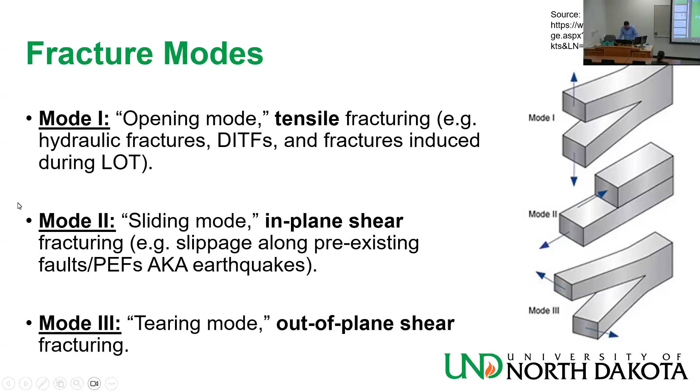Last time we finished talking about shear failure, we saw something very important, which was the Mohr-Coulomb diagram. We have this picture from Miss Gono's thesis. I think now she's on the East Coast doing something related to data analysis.

She used the Mohr circle to indicate how injecting salt water in the Fort Worth Basin can get pre-existing faults in the vicinity of those injection wells close to slipping. You get bigger and bigger fault slippage, and then you get the failure, the earthquakes everybody is observing. Initially they blamed hydraulic fracturing, but then they realized it's not hydraulic fracturing itself, but a byproduct of it, which is tons of salt water that had to be dealt with and got reinjected underground into the Ellenberger formation, and that basically causes earthquakes like crazy.

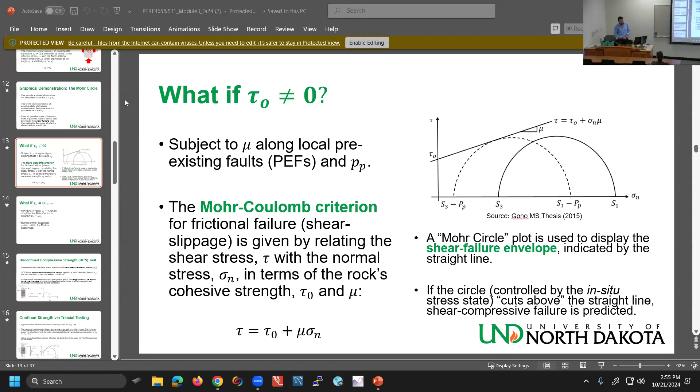It's not good, it releases all the pressure. It's like you are providing a conduit for the fluid to move, and then the fluid basically prefers to go there than create the bigger job you actually want.

Anyway, then we talked about Mr. or Doctor, I don't know, Byerlee, 1978. He did experiments on very big blocks of rock and found that for the stuff we're talking about, mu is about 0.6 to 0.8. If he had to put a point at one of the two edges of the spectrum, he would say 0.6 is pretty accurate. It's pretty good - you wouldn't expect it to go beyond 0.8 or too much less than 0.6.

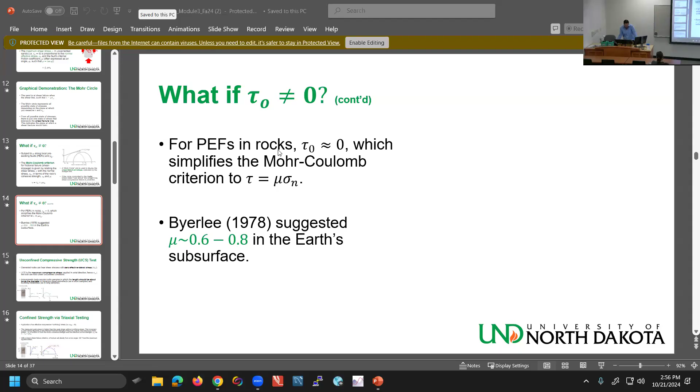Let me see, okay, here. We're going to talk about, just like we talked about the Brazilian test for tensile strength - that was fairly simple. Now what about the UCS, sorry, what about the shear failure? Because remember the Brazilian test was for tensile failure, I apologize. Now what about shear failure? We're going to talk about the UCS test, the unconfined compressive strength test, which is also carried out in a triaxial loading frame, like the one we have in our lab.

That doesn't work, I think. The triaxial doesn't work for some reason. Which triaxial? The one at the back. Uniaxial? No, triaxial. Only that one worked. Do we have triaxial? Yeah, we have uniaxial, no? It's not called uniaxial, it's called triaxial - that's why the real triaxial, they call it true triaxial.

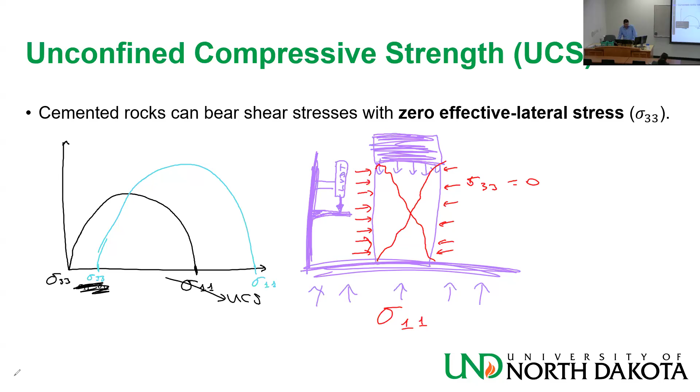Okay, let's see what I wrote here. UCS is the maximum compressive stress applied in the axial direction the rock can hold under unconfined conditions.

Axisymmetric tests require rock samples in which the length should be about twice the diameter, to minimize shear end effects as in short samples, and buckling instabilities as in long samples. So you want a sample that won't bend to the side, like you don't want this to bend like this too much. And you don't want it too short that it's gonna cause shear effects, the shear on the surfaces to be too dominant.

It's like we have capillary end effects in core flooding, if you took petrophysics, very, very similar. That's why you need to have your core longer, for insurance and perturbation stuff. For the UCS test, 1 inch diameter, 2-inch length makes sense. And this basically shows what I drew earlier.

He was using sigma A for axial, and I put sigma 1 on top of it, and sigma 3 here. There is nothing on the sides, right? So sigma 1 is basically the UCS, unconfined compressive strength.

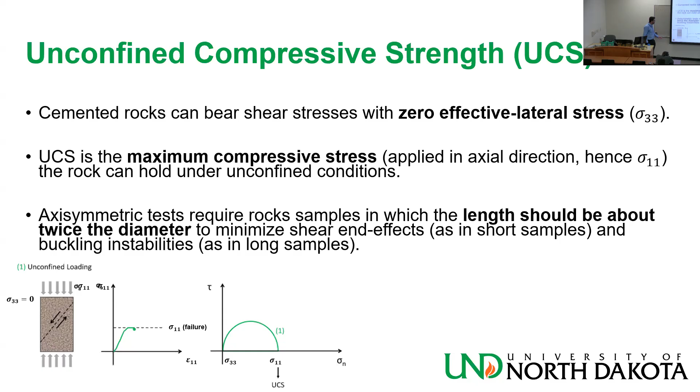What about confined? Oh my God, what is going on here? Application of an effective compressive confining stress, maybe using a pump or something. We don't care about how, let me make everything visible to avoid confusion. You don't care how you apply it, you care that there is a sigma 3.

The sigma 3 is no longer 0, right? I applied it on the side somehow. So now I'm gonna need an even bigger axial stress, an even bigger confining stress. And this is what they used here. Of course, with a linear shear failure criterion, which is basically the Mohr-Coulomb failure criterion, you will get an angle, a fracture, like I said earlier, at 60 degrees from the maximum applied stress.

Oh, it already shows it. I was gonna draw something, but it's already drawn. Sigma A, for us this is sigma 1 minus sigma 3. We don't know yet what is sigma, it's axial minus radial. But in this case, the radial is the confining, which is sigma 3. Yeah, because he has it. This is from Espinoza's notes. This is sigma 1, this is sigma 3.

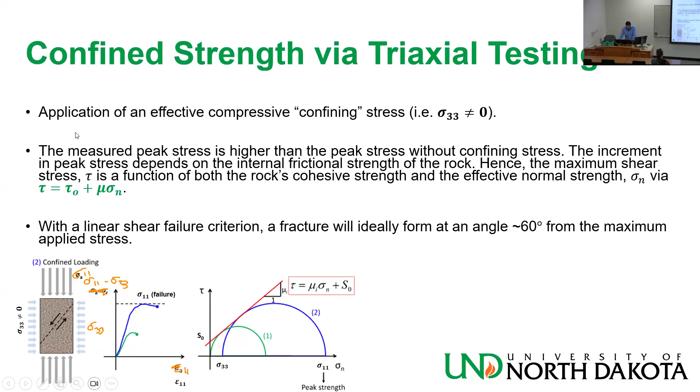Let me clean everything. Now, I have a slide explaining something I already did explain. The rock is not like the cores, because core samples are intact. The rock is very big, it's heterogeneous, it has a lot of pre-existing fractures, heterogeneity, anisotropy, etc.

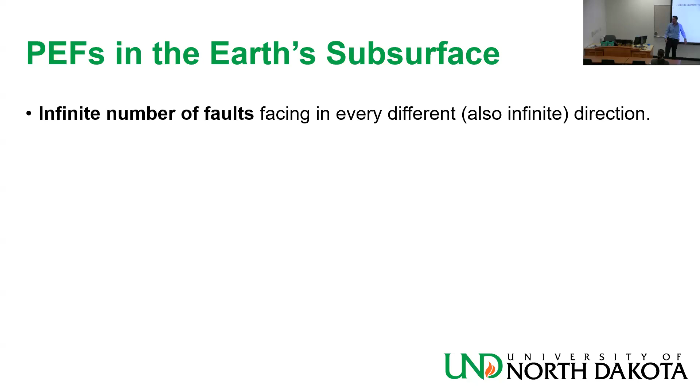So you can assume an infinite number of faults facing in every direction, basically. DFN - discrete fracture network. Those are natural, extensive fracture networks, but natural fractures facing in all directions.

So if I'm injecting here and I have a fault, the easiest way to fracture is a fault facing this way, being stressed at this value. That's what the assumption is saying - very important assumption. They can be loaded at any stress.

In a formation with faults at a variety of angles to the current stress, the faults that are hydrologically conductive today are those that are critically stressed in the current stress field. The critically stressed fault hypothesis posits that faults that are mechanically alive are hydraulically alive, and faults that are mechanically dead are hydraulically dead.

It basically tries to say what I was trying to say with more scientific language. It's a statistical thing - if you have a bigger sample, you have a bigger number of faults. And if you have a bigger number of faults, you have more chances to have different angles, and then different chances to have different stress environments.

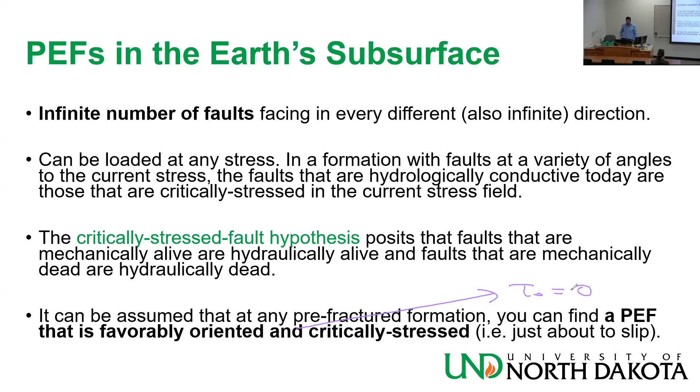It can be assumed that in any pre-fracture formation - if you see this phrase in an exam, it's very important, it simplifies your equation very easily - you can find a PEF that is favorably oriented and critically stressed, i.e. just ready to slip, ready to slip.

So I would say this is the most important point of the slide. Forget about the rest, just remember the critically stressed fault hypothesis - it means this. And pre-fracture formation means this. Very, very important.

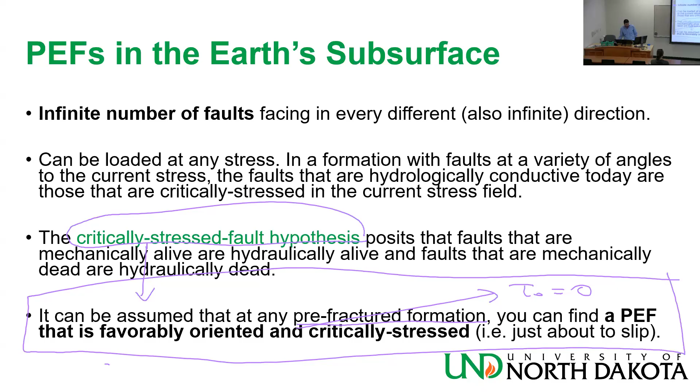Oh, we have 4 minutes. Good, I might be able to introduce this very important equation: in situ stress state stability, considering shear slippage along PEFs.

Okay, now the question is - we talked about in situ stress states, right? We talked about SV, SH max, Sh min. We also talked about them in terms of S1, S2, S3. They're the same thing, just different nomenclature, and they mean more or less the same thing, but with different definitions.

Now let me ask you a question. If I ask you to write down combinations of stresses - SV, SH max, Sh min - you only need to make SH max bigger or equal to Sh min, right? That's the only rule. And SV is vertical, the other two are horizontal. But the only rule in terms of magnitude is SH max is bigger or equal to Sh min.

Okay, how many permutations or combinations of stress states can you write? Nine? No?

That depends, of course, on the slant of your line, which is mu. It depends on that. But we're not going to use the Mohr circle - we're going to use the same equation for the Mohr circle, but in a different form. So we're going to say the stability of faults against shear slippage, frictional failure, is given by this condition.

And this is the most important equation for your exam number 2, that I was mentioning earlier.

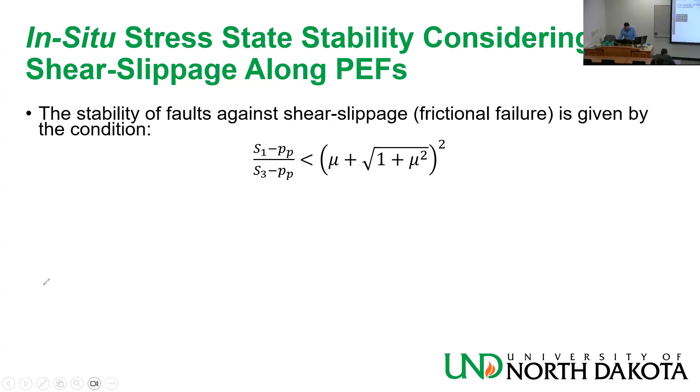This is the same equation as this. It's the same equation. So this is the same thing as saying tau for stability is this - this is the same exact equation. You're asking where the tau O is? Because we have PEF, it's gone, so I don't have tau O. I only have this and this.

And for a conversion to Cartesian coordinates, because we know the tau is not a directly applied value, it's a value applied by S1 and S3, I use this version. There is a way - I used to know how to go from this to this, when I was undergrad. Basically it's the same equation.

The sigma n is the one in the middle, right? The middle of the circle. The sigma n, no, it's the x-axis. Yeah, but if you apply sigma 1 and sigma 3, your sigma n will be the one in the middle of the circle, right? No, sigma is the x-axis - it's the whole x-axis, it's a variable.

The shear is - but the normal stress in terms of sigma 1 and sigma 3, what is it? Oh, the middle, the midpoint. Some people say it's S2. No, it's not S2 - S2 is a different circle. It's sigma 1 plus sigma 3 divided by 2, something like that. Yeah, it's part of the derivation.

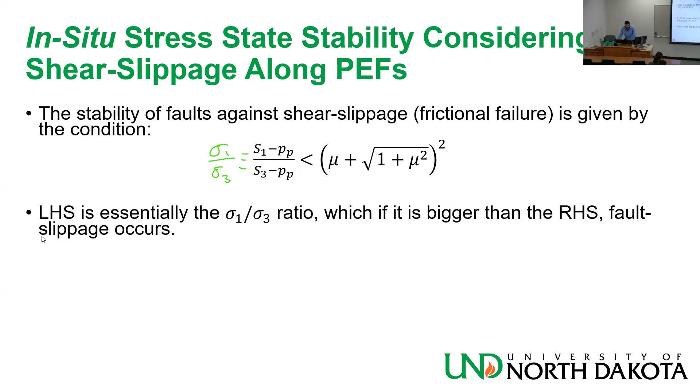Let's finish this slide and we will go. The left-hand side is basically sigma 1 divided by sigma 3. I'm using only one value because I'm assuming they are principal. The right-hand side only has mu, basically only depends on mu. And remember, it assumes that what I said earlier is true: all faults are critically stressed.

And because the right-hand side only depends on mu, if I take Byerlee's equation, I can put 0.6 here and I get 3.12. And I can put 0.8 there and I get 4.33. So ultimately, this equation becomes sigma 1 divided by sigma 3 less than 3.12 to 4.33, right?

And that's what I will solve, or basically we use this for stability. If the left-hand side becomes bigger than this, I have failure - I have an earthquake. I need to be less than this to be stable. We are going to demonstrate it graphically next class with a very important concept - the second most important, and I guess second most difficult, concept in this class: the stress polygons.

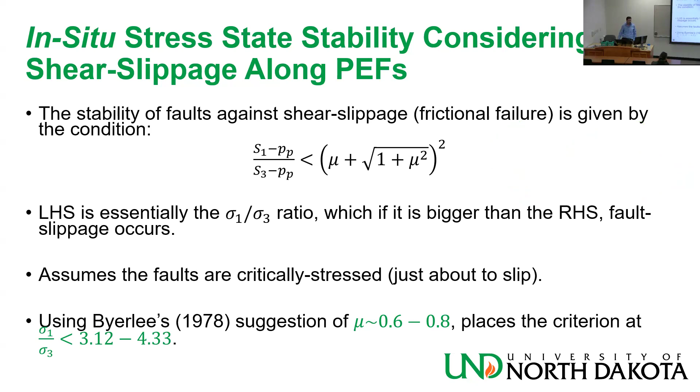Yeah, I mean it's important, it's very important - stress polygons are very important, and many people know it.